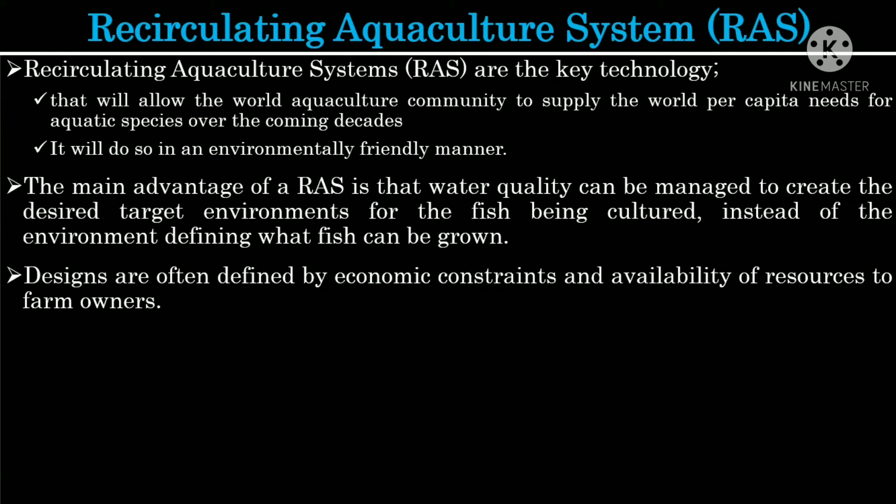There is no single system that will address all needs. Designs are often defined by economic constraints and the availability of resources to farm owners.

As a comparison, conventional aquaculture methods such as outdoor pond systems and net pen systems are not likely to be sustainable in the long term.

This is due to significant environmental issues and their inability to guarantee the safety of their products to consumers.

Conversely, indoor fish production employing RAS is sustainable, infinitely expandable, environmentally compatible, and has the ability to guarantee both the safety and quality of the fish produced throughout the year.

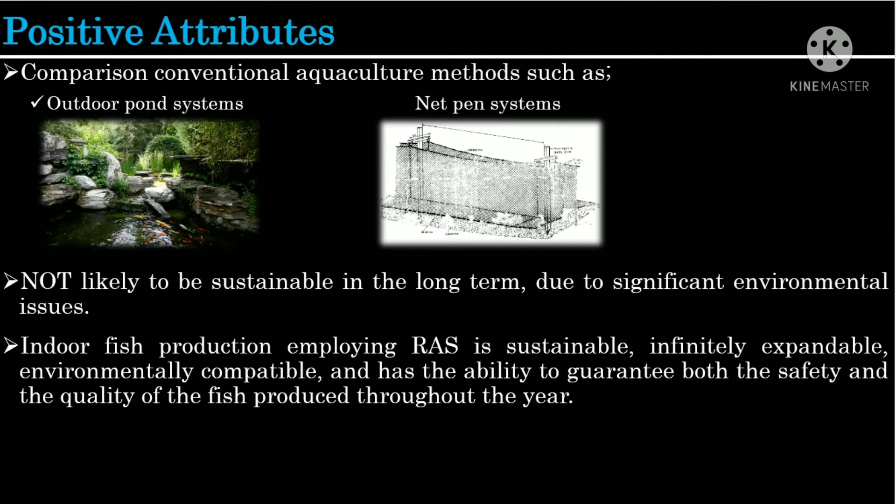Indoor RAS offer the advantage of raising fish in a controlled environment, permitting controlled product growth rates and predictable harvesting schedules.

RAS conserves heat and water through water reuse after reconditioning by biological filtration using biofilters.

It allows effective economies of scale, which result in the highest production per unit area and per unit worker of any aquaculture system. RAS are environmentally sustainable.

They use 90 to 99% less water than conventional aquaculture systems, or less than 1% of the land area, and they provide for environmentally safe waste management treatment.

RAS allows year-round production of consistent volumes of product and complete climate control of the rearing environment, because RAS can be set up to produce the same volume of fish week in and week out.

They have a competitive advantage over outdoor tanks, pond systems, or wild catch, which are seasonal and sporadic in harvest.

However, RAS are almost universally employed to produce salmon smolts, and designs continue to improve that are more cost competitive with conventional aquaculture systems. Recent economic studies on land-based salmon systems show that salmon can actually be produced more cheaply in RAS.

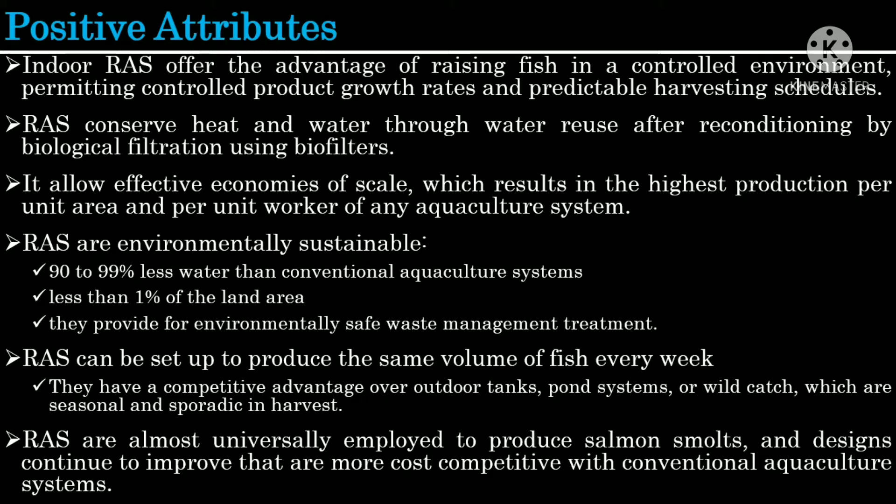But the capital costs are still too high to justify the major changes in the way salmon are currently grown in net pen systems.

Indoor aquaculture is probably the only potential method that could ensure a 100% safe source of seafood, free from all chemicals and heavy metals.

With increasing consumer concern about food safety, aquaculture producers using RAS have an unprecedented opportunity to meet the demand for safe seafood.

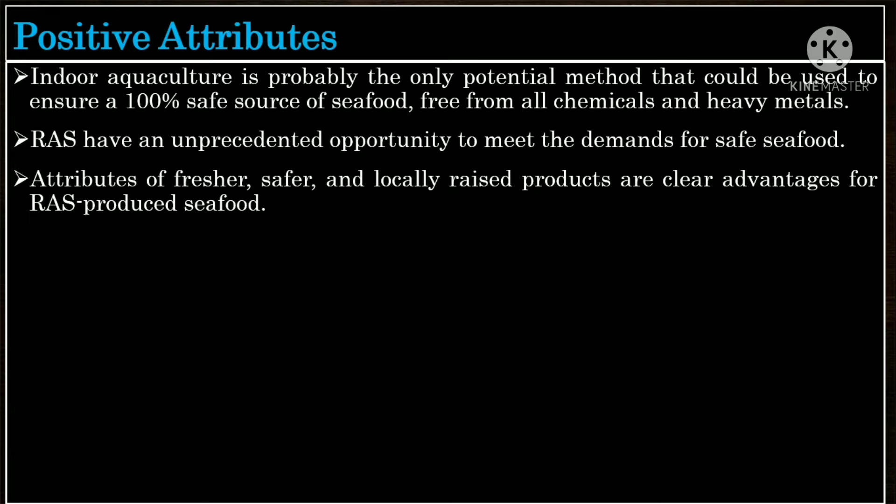The attributes of fresher, safer, and locally raised products are clear advantages for RAS produced seafood. So, next is the system engineering.

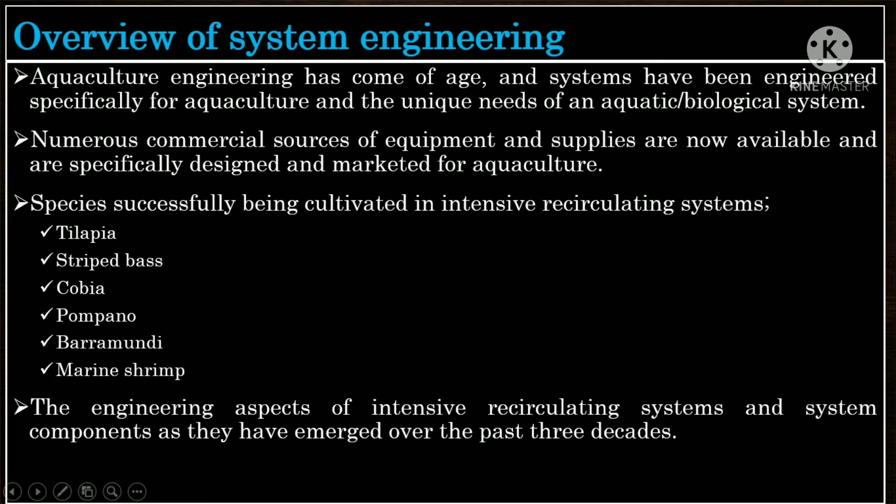Aquaculture engineering has come of age, and systems have been engineered specifically for aquaculture and the unique needs of an aquatic or biological system. In addition, numerous commercial sources of equipment and supplies are now available and specifically designed and marketed for aquaculture. Species successfully being cultivated in intensive recirculating systems include tilapia, striped bass, cobia, pompano, and barramundi, and marine shrimp. So here's an overview of the engineering aspects of intensive recirculating systems and the system components as they have emerged over the past three decades.

First, the concept of a unit process is introduced, where a specific treatment process is used to treat the water as it is recirculated through the system. For example, solids removal, ammonia converted into nitrate, oxygen added, carbon dioxide removed, and in some cases, if necessary, disinfection. Then, examples of treatment technologies currently used are described and linked together within a complete recirculating system design. And finally, a design example uses the engineering concept of mass balance to show how to estimate water flow requirements for oxygen, ammonia removal, solid waste removal, and carbon dioxide removal.

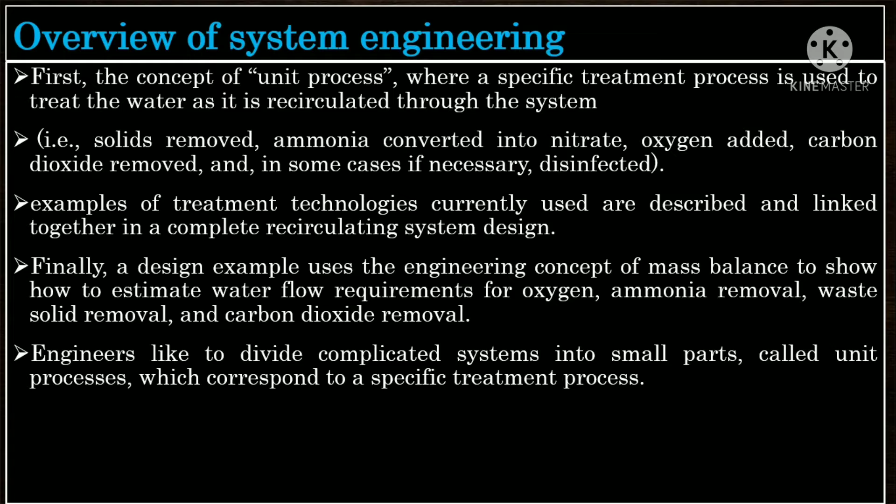The monitoring and control system oversees all of these processes and controls the set points of water quality, sounding an alarm if they move outside of acceptable ranges. A biosecurity program and process must be absolutely superimposed on the whole process and farm to prevent losses due to disease introduction from the outside.

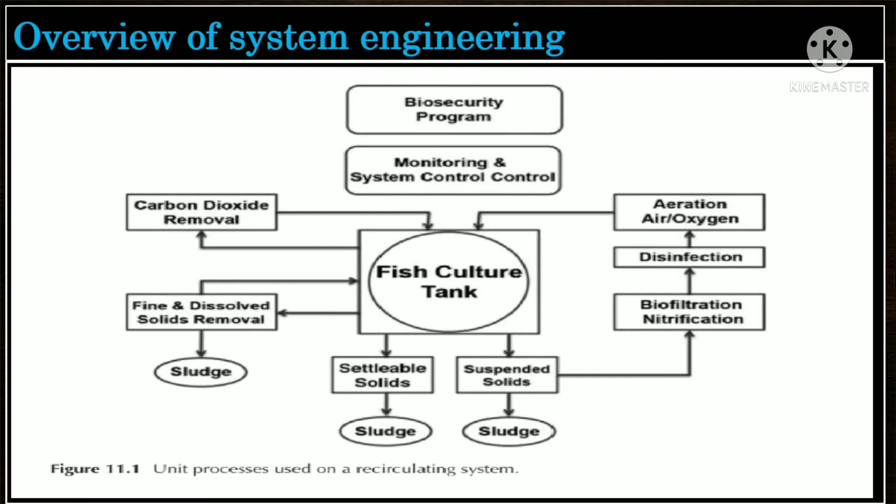In a real-world system, the individual unit processes are usually linked together as the water flows through each process of the recirculation. Usually, 10 to 20% of the discharge flow from a culture tank is removed from the center drain to take advantage of the teacup effect, which concentrates the solids to the central drain flow. Some form of suitable solids removal device, like a swirl separator, radial flow clarifier, or settling basin, pretreats this flow stream, which is then combined with the remaining 80 to 90% of the discharge from the side outlet.

This combination of center drain and sidewall drain is usually referred to as a Cornell dual drain system. The remaining suspended solids are then removed, usually by either a rotating microscreen filter or floating bead filter.

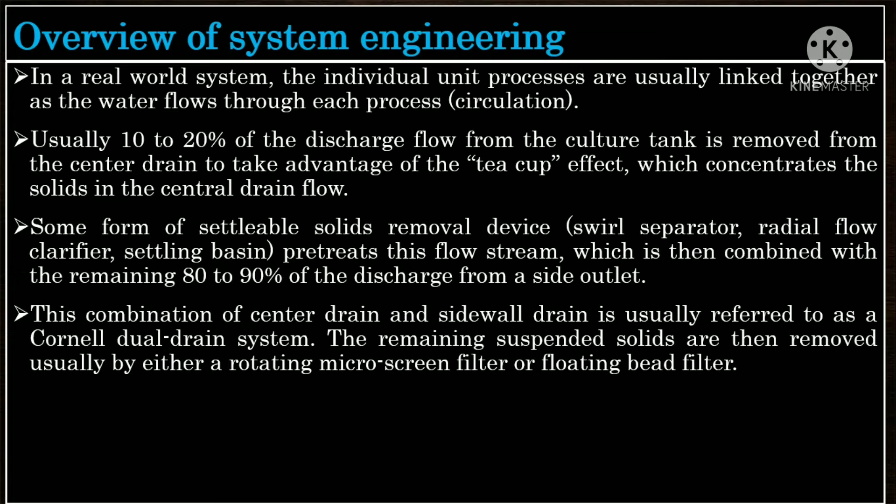Next is the culture tanks. People have used a wide variety of materials to construct tanks, including just about anything that holds water. Simple molded polyethylene tanks are often used due to their low cost, smooth surface that makes for easy cleaning, and their low weight, which allows for quick setup and relocation. They work well for the most part, but because they are very soft and malleable, they need to be well supported on the bottom.

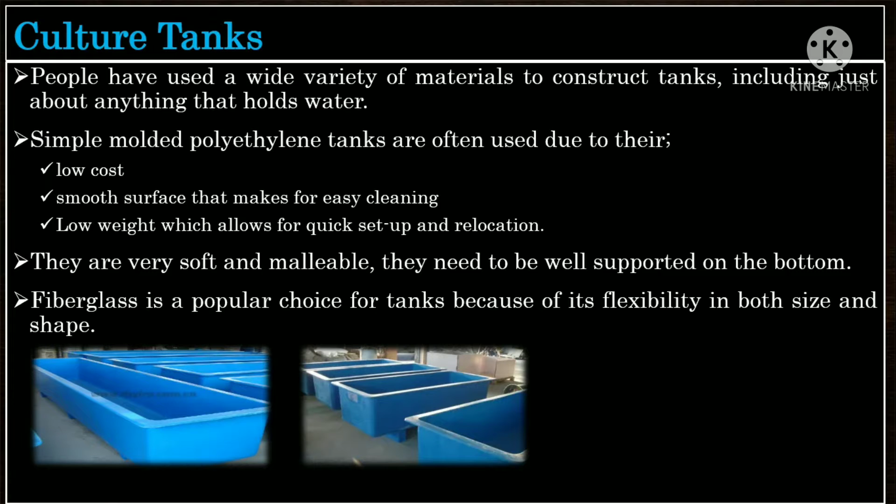Fiberglass is the most popular choice for tanks because of its flexibility in both size and shapes. The fiberglass tank panels are easy to cut, drill, and modify, and repairs are relatively easy. Large fiberglass tanks come in easily transported components that are field assembled in almost any diameter. The bottoms are usually poured concrete where the drains and heating coils are embedded, along with the tank sidewall.

Tanks can be partially buried to conserve heat and make fish observation easier. Concrete is always an option in making tanks. It is extremely strong but very permanent. Mixed cell raceway designs are another option for tank design, combining the advantages of a raceway for grading and sorting and a round tank for solids removal.

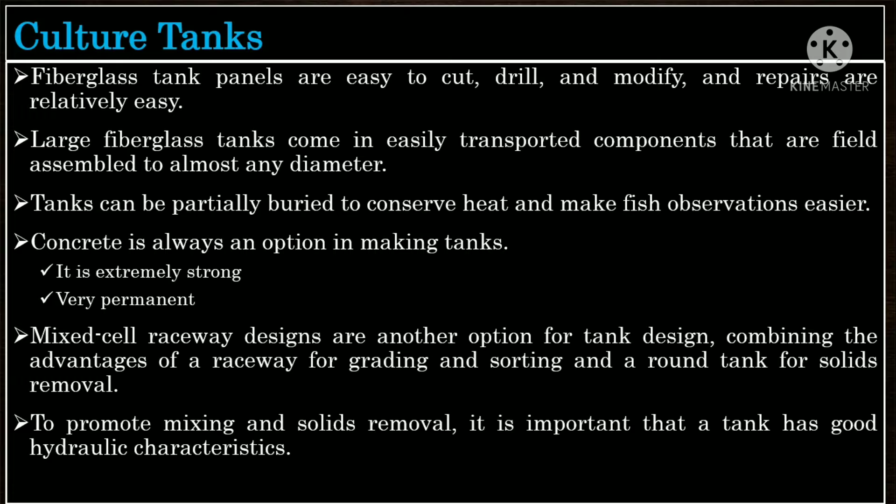To promote mixing and solids removal, it is important that a tank has good hydraulic characteristics. One of the most important rules for RAS is that solids need to be removed from the tank as quickly and efficiently as possible to reduce the solids' impact on water quality. Tanks can be characterized by diameter, capital D, to depth, small d, ratio, which is the diameter-to-depth ratio.

This ratio should be maintained greater than 3 and less than 10, and preferably less than 5, as in the deeper tank given the same diameter.

Using this range of D/d ratio will minimize the problems of solids settling before reaching a center drain, indicating that a tank is too shallow, that is an excessive D/d ratio.

Or not settling fast enough to reach the drain by being continually resuspended, indicating a silo type tank that is too deep, and that is too small of a D/d ratio.

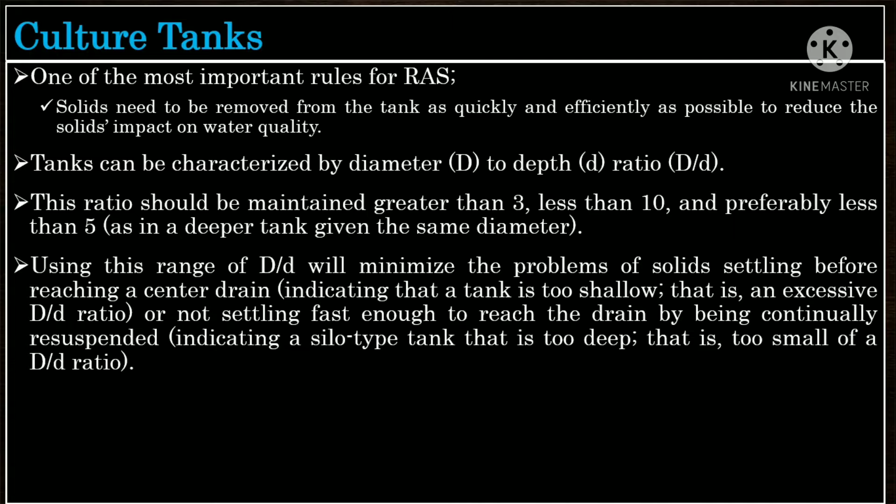Next is waste solids removal. Waste solids are produced in an aquaculture system as uneaten feed, feed fines, fish fecal matter, algae, and sloughed biofilm cell mass from biological filters.

The waste solids influence the efficiency of all other unit processes in the recirculating system, and they are a major source of carbonaceous oxygen demand and nutrient input into the water, and can directly affect fish health within the recirculating system.

Therefore, solids removal is considered one of the most critical processes in an aquaculture system.

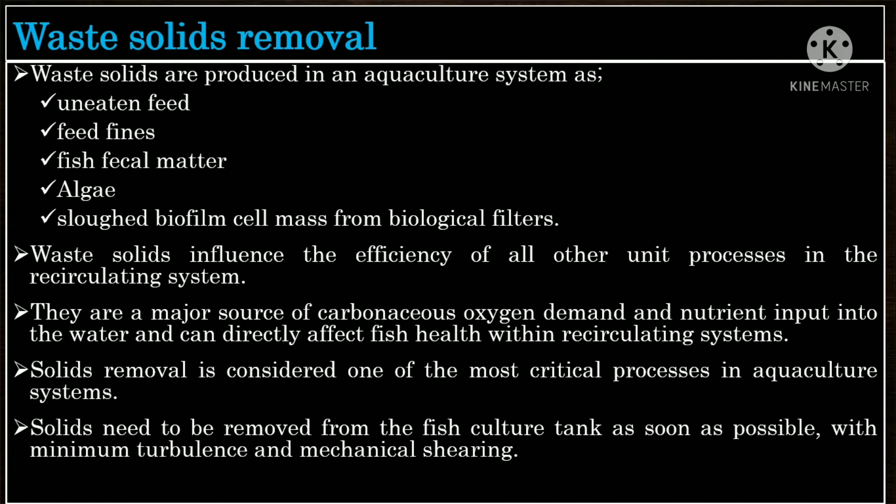Optimally, solids need to be removed from the fish culture tank as soon as possible, with minimum turbulence or mechanical shearing. Solids are generally classified into three categories: settleable, suspended, and fine or dissolved solids.

In a recirculation system, two of these are the primary concern. The waste solids can be removed either through settling within the culture unit or through the use of a solids removal unit.

Following the rearing tank, several unit process options are currently being used in aquaculture: settling basins and radial flow clarifiers, mechanical filters, granular media filters, and flotation or foam fractionation.

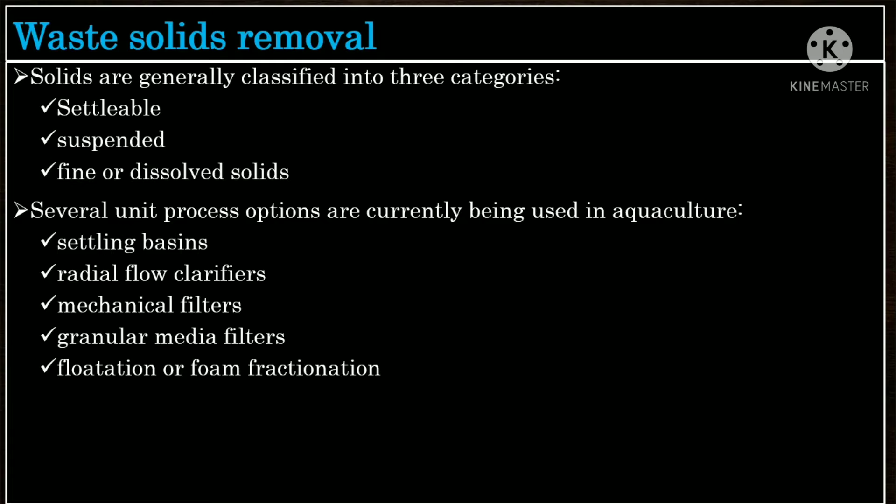Next is the Cornell dual drain system. It uses the culture tank itself as a swirl separator, the teacup effect, and removes most of the settleable solids from a small percentage of the discharge from the center drain.

The design is applicable to round tanks, and it is very effective in removing the majority of large, quickly settleable solids such as uneaten feed and fecal matter.

This is achieved using only a small portion of the total water flow, 10 to 25%. This waste stream can then be further concentrated using either settling basins or additional swirl separators.

Remember, the objective is to create a small, concentrated flow that is easily treated, rather than a large, diluted flow of waste.

Solids concentrated at the bottom center can be removed in a small flow stream by using the bottom drawing center drain, while the majority of the flow is withdrawn at an elevated drain. The dual drain system uses a center drain that removes 10 to 25% of the flow and a higher sidewall drain for the majority of the flow.

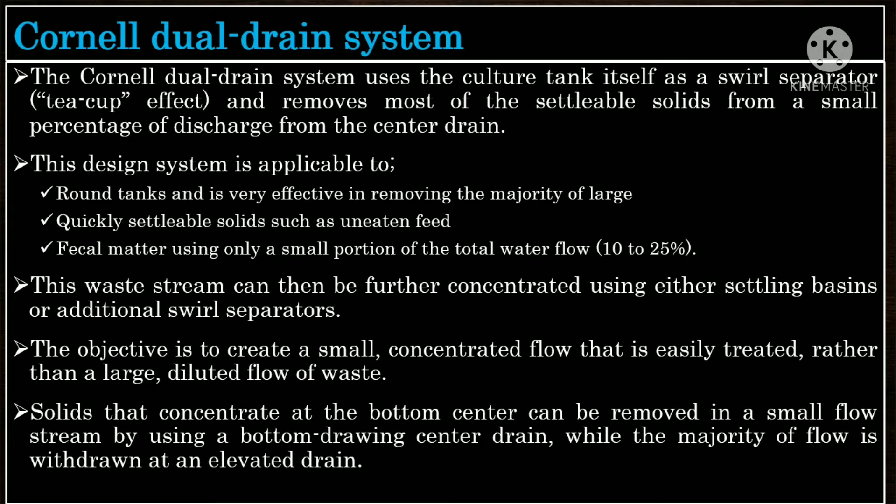These are 6 liters per minute per meter squared, or 0.15 GPM per foot squared of the tank floor area.

The hydraulic retention time, or HRT, for the center drain should be less than 200 minutes, and 15 to 25% of the total tank flow rate.

After calculating these three values, the largest of the three should be used. A final criterion that should be applied to the drain design outlet is that the tank outlet should be approximately 10% of the tank diameter.

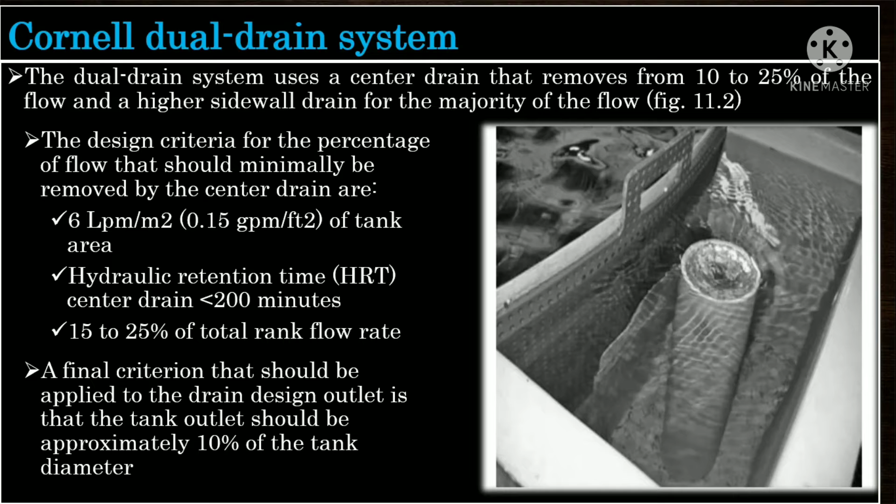This is because of the D to D ratio. The recommendation is as follows: solids should settle on the floor within 5% of the tank diameter of the center drain and be removed there.

For example, if a tank were 10 meters in diameter, the center drain should have an effective diameter of 1 meter, using a flat plate slightly elevated above the tank floor.

And the solids will settle within 0.5 meter of the center point of the tank floor. This solid would then be drawn into the center drain by the high velocity created by the flow out of the center drain. By concentrating the majority of the solid waste in only 10 to 25% of the flow leaving a tank via the center low flow drain.

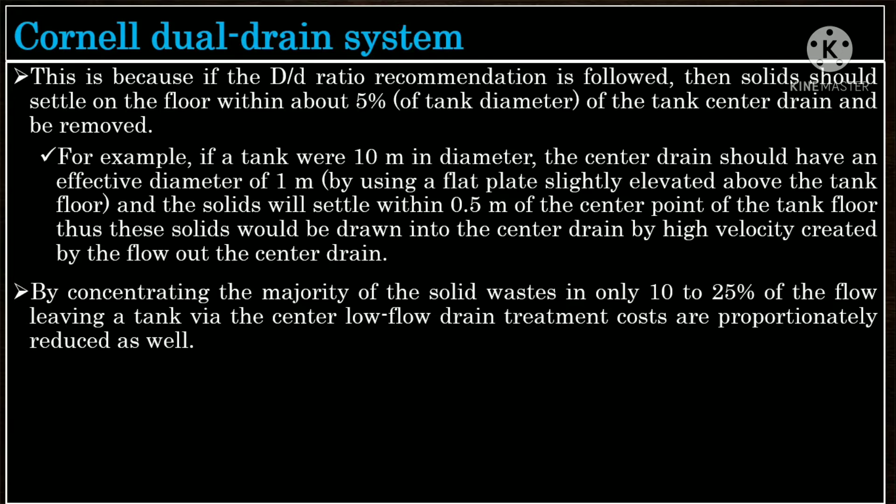Treatment costs are proportionately reduced as well. Next is settling basins and tanks.

A settling basin is simply a tank that provides a quiet, non-turbulent area where the flow rate is low and the solids are allowed to settle out of suspension by gravity.

The advantages of settling basins are simplicity of operation, low energy requirements, and low construction costs.

The disadvantages include the large size of settling basins, their low removal efficiency of small or low density particles, and leaching of nutrients from the settled solids back into the system while the solids are stored in the settling basin.

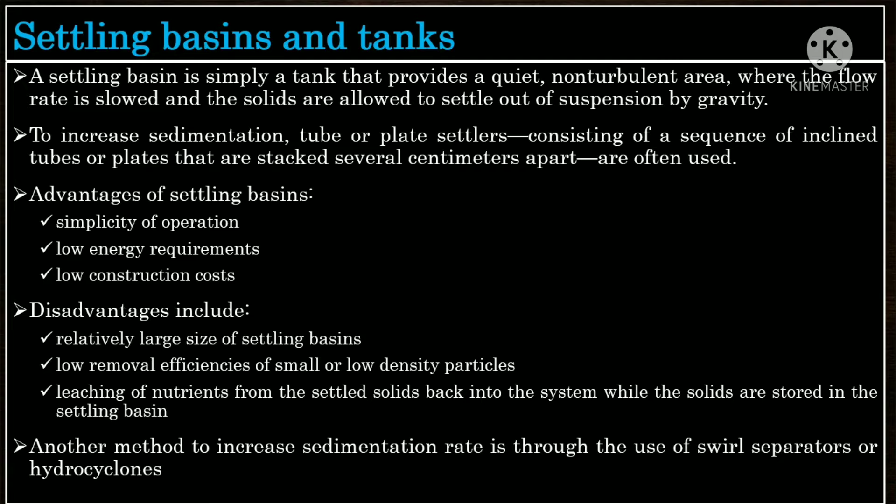Another method to increase the sedimentation rate is through the use of swirl separators, or hydrocyclones, and these have most often been used in aquaculture circulating systems to concentrate the solids from the dual drain culture tank system.

Next are the mechanical filters. There are two types of mechanical filters commonly used in aquaculture to remove the suspended solids: the screen filters and the expandable granular media filters.

The suspended solids from an aquaculture viewpoint are within the fraction of total solids that will not settle out of the water column in a reasonable amount of time, within 30 to 60 minutes. This fraction of solid waste needs to be removed from the culture tank water because of its potentially high oxygen demand and mineralization, with an increased rate of ammonia nitrogen being added to the water column as the protein and urea in the feces is broken down by bacteria into ammonia.

Microscreens are used to remove suspended solids in both research and commercial recirculating systems, and they act as a form of sieve that retains suspended particles larger than the fine mesh filter screen openings.

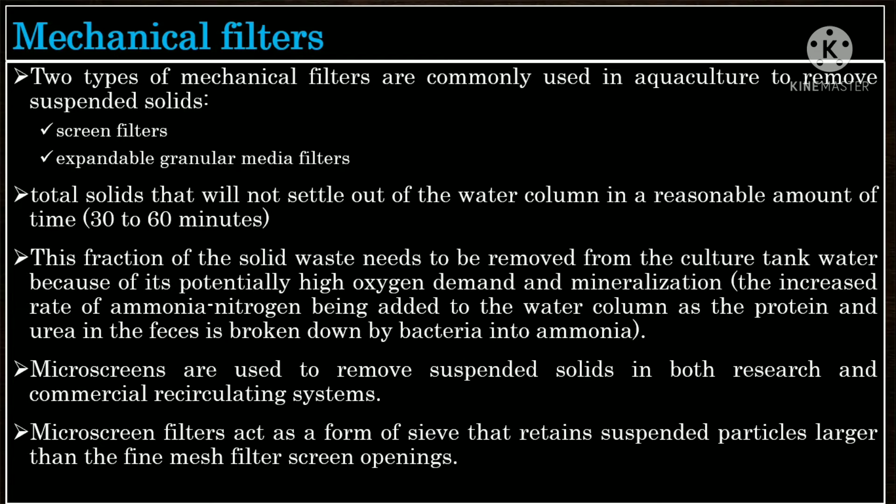The rotating microscreen filters, in a variety of sizes and flow rate capacities, have numerous advantages. The primary one is that they are easy to install and operate. Almost all microscreen filters work on the principle of physical interception of particles on screen and their removal by means of a water spray.

Microscreens are especially attractive when used to remove solids from large flow streams, and they are compact in size and cause minimal head loss. The disadvantages of these systems are high maintenance requirements and relatively high capital and operating costs.

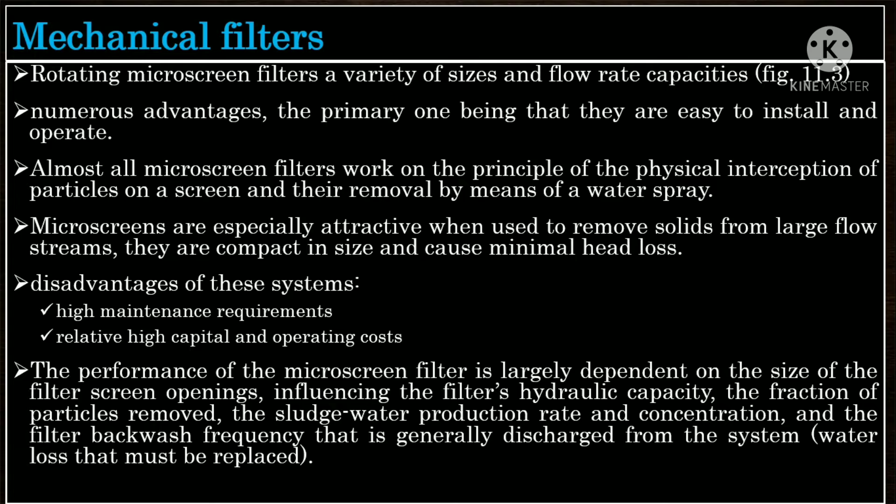The performance of the microscreen filter is largely dependent on the size of the filter screen openings, influencing the filter's hydraulic capacity, the fraction of particles removed, the sludge water production rate and concentration, and also the filter backwash frequency that is generally discharged from the system, with the water loss that must be replaced.

Next are the granular media filters. The granular media filters operate by passing the water laden with suspended solids through a bed of granular material, which traps the solids through sedimentation, straining, and interception.

The bead filters are the most popular form due to their low head loss and low water requirements for backflushing. The bead filters have replaced the use of sand filters for all practical purposes.

While the sand filters can do a superb job at removing the solids, typically a sand bed is flooded from the top and water is allowed to percolate through the sand. Sand filters, such as those used in swimming pools, operate under the same principle but use water pressure to force the solids-laden water through the sand.

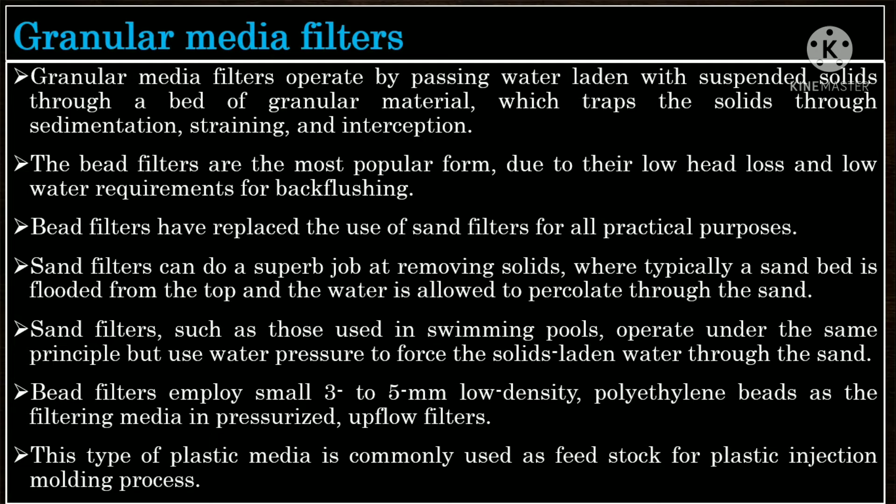The bead filters employ small 3 to 5 millimeter low density plastic media, commonly used as feedstock for the plastic injection molding process. These filters have been successfully used for both solids capture and biofiltration.

Traditionally, the disadvantage of this type of filter has been a large volume of water required for backflushing, although much less is required than the sand filter design. The PolyGeyser class of bead filters has successfully addressed this problem.

The suspended solids and dissolved organic compounds that build up over time in intensive recirculating systems are not removed by mechanical filtration or granular media filters.

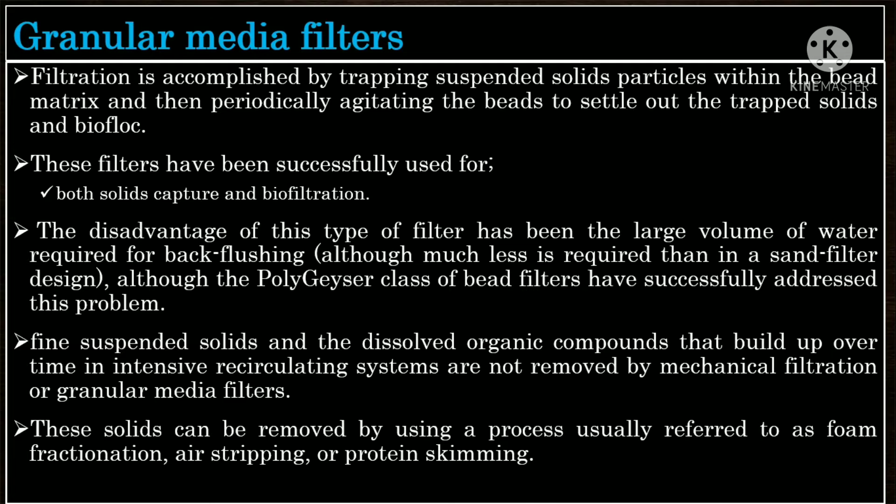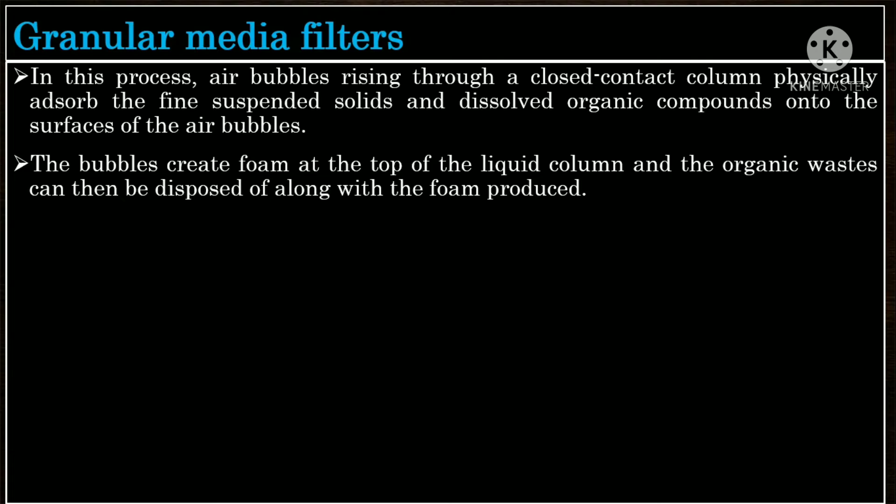These solids can also be removed using a process usually referred to as foam fractionation, air stripping, or protein skimming. In this process, air bubbles rising through a close contact column physically adsorb the fine suspended solids and dissolved organic compounds onto the surfaces of the air bubbles. The bubbles create foam at the top of the liquid column, and the organic wastes can be disposed of along with the foam produced.

Next is the disposal of the solids. In general, aquaculture solid wastes are treated as an agricultural waste and considered a non-toxic nutrient source. Land application of the waste solids on-site at agricultural fields is usually the cheapest method of solids disposal.

Land application is governed by regulations that limit the amount of pathogens, heavy metals, and other contaminants such as nutrient content, soil type, and plant nutrient uptake. These characteristics are meant to prevent runoff or groundwater contamination.

One of the newest techniques for containing sludge is to use geotextile bags. These are porous textile bags that receive the waste stream and capture solids while allowing the water to drain off for recapture. In many cases, a polymer or flocculation agent is added to the influent to improve solids-liquid separation. Alum or ferric chloride can also be added as a coagulation aid, which also helps sequester dissolved phosphorus. Composting of waste solids using thermophilic bacteria creates a valuable soil amendment and can also be used to dispose of fish mortalities in a safe manner. The anaerobic and aerobic waste will require careful engineering design to be properly sized and managed.

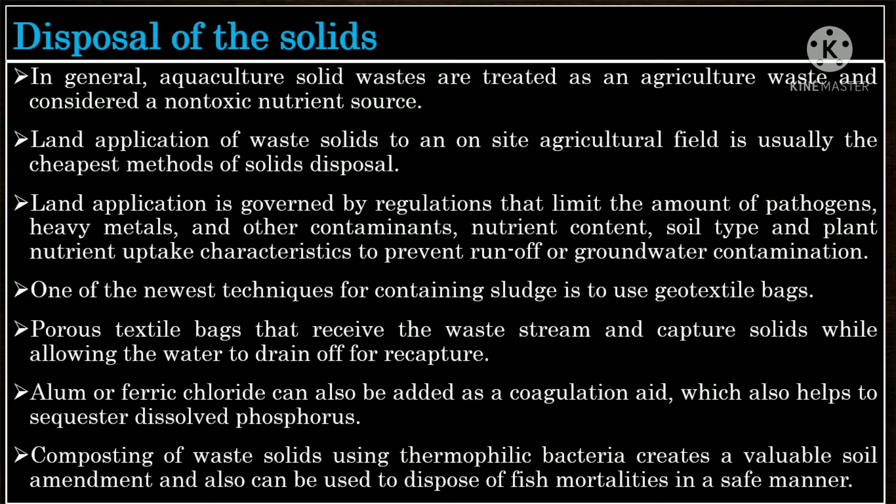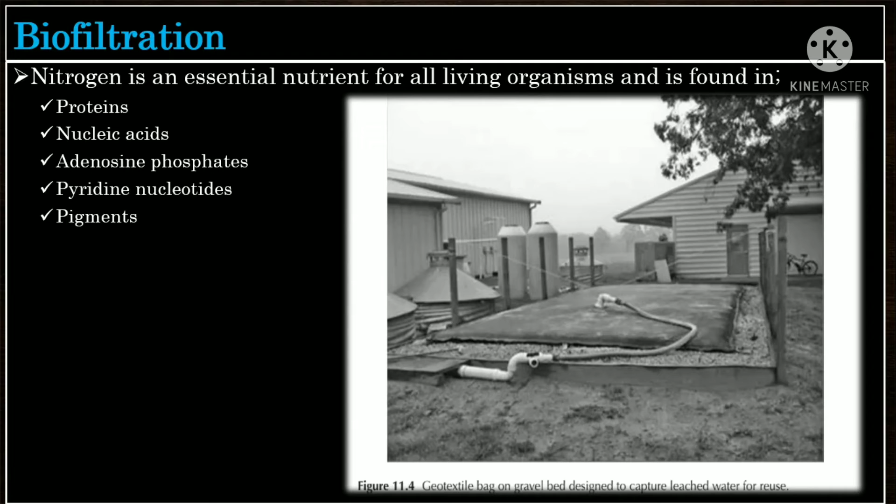Next is biofiltration. Nitrogen is an essential nutrient for all living organisms and is found in proteins, nucleic acids, adenosine phosphates, pyridine nucleotides, and pigments.

There are four primary sources of nitrogenous waste. The first is urea, uric acid, and amino acids excreted by the fish. The second is organic debris from dead and dying organisms. The third is uneaten feed and feces. And the last is nitrogen gas from the atmosphere.

Various nitrogenous waste products are expelled by the fish through gill diffusion and gill cation exchange, along with urine and feces. The decomposition of these nitrogenous compounds is particularly important in intensive recirculating aquaculture systems because of the toxicity of ammonia, nitrite, and to some limited extent nitrate.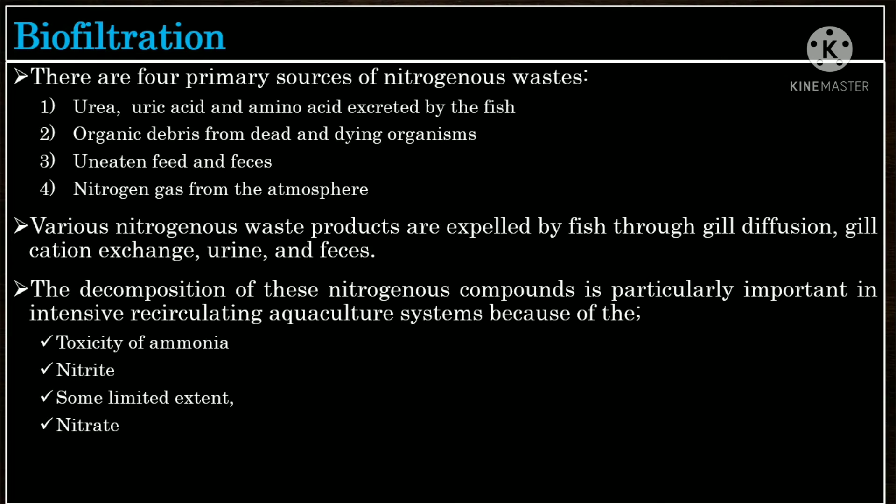The reverse process is called denitrification, an anaerobic process where nitrate is converted into nitrogen gas. Denitrification is becoming increasingly important, especially in marine systems, as stocking densities increase and water exchange rates are reduced, resulting in excessive levels of nitrate in the culture system.

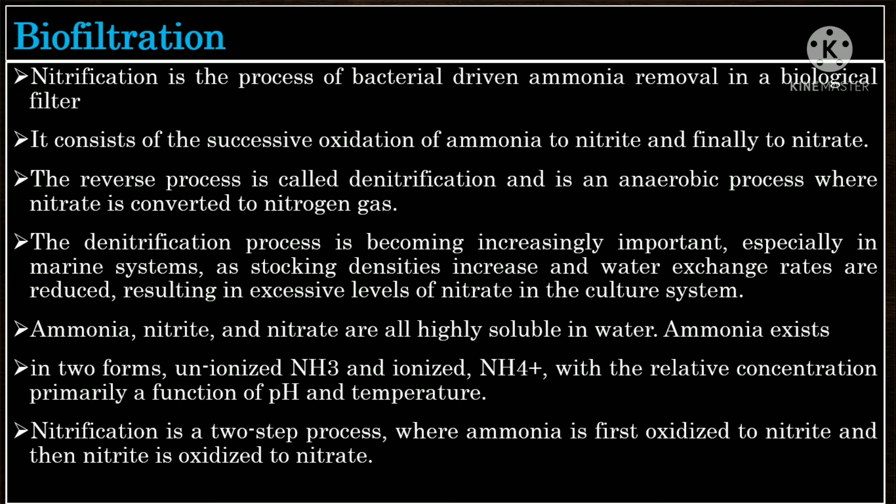Ammonia, nitrite, and nitrate are all highly soluble in water. Ammonia exists in two forms, unionized and ionized, with the relative concentration primarily a function of pH and temperature. Nitrification is a two-step process where ammonia is first oxidized to nitrite, and then nitrite is oxidized to nitrate. These two steps are normally carried out sequentially.

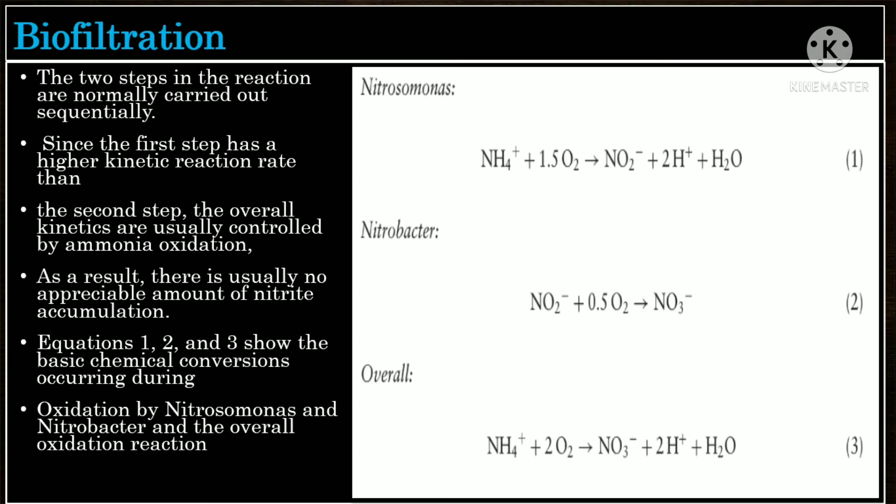Since the first step has a higher kinetic reaction rate than the second step, the overall kinetics are usually controlled by ammonia oxidation, and as a result there is usually no appreciable nitrite accumulation. As shown in equations 1, 2, and 3, these show the basic chemical conversions occurring during oxidation by Nitrosomonas and Nitrobacter, and the overall oxidation reaction.

Alkalinity, measured or defined in terms of calcium carbonate, is generally added using sodium bicarbonate or baking soda, or calcium carbonate, and slaked lime or hydrated lime. Sodium bicarbonate has the advantage of being rapidly dissolved and very safe to handle — you can even eat it if your stomach is upset.

The ammonia removal capacity of the biological filter is largely dependent upon the total surface area available for biological growth of nitrifying bacteria. The media used in biofilters must be inert, non-compressible, and not biologically degradable. Typical media used in aquaculture biofilters are sand, or some form of plastic or ceramic material shaped as small beads, large spheres, rings, or saddles.

Biofilters must be carefully designed to avoid oxygen limitation or excessive loading of solids, biochemical oxygen demand, or ammonia. There are several types of biofilters commonly used in commercial intensive recirculating aquaculture systems: trickling biofilters, floating bead filters, fluidized bed biofilters, downflow microbead filters, and moving bed bioreactors, or MBBR.

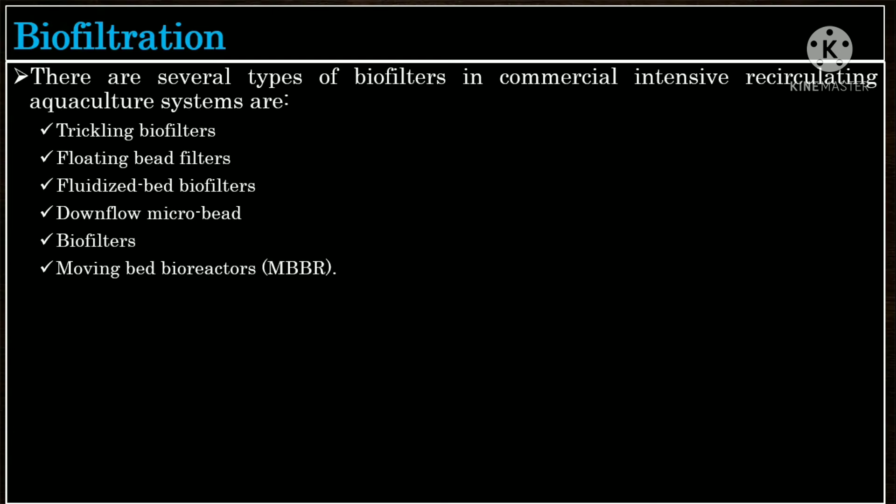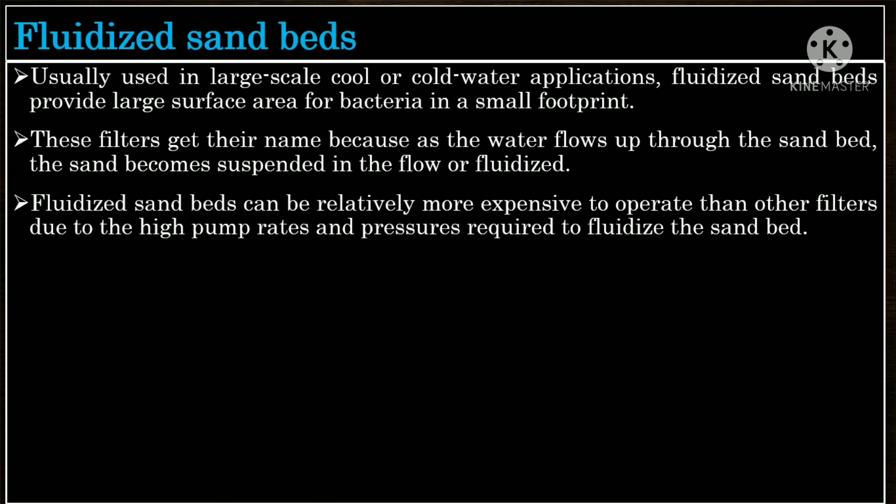Next are fluidized sand beds, usually used in large-scale cool or cold water applications. Fluidized sand beds provide a large surface area for bacteria in a small footprint. This filter gets its name because as water flows up through the sand bed, the sand becomes suspended in the flow, or fluidized. Fluidized sand beds can be relatively more expensive to operate than other filters due to the high pump rates and pressure required to fluidize the sand bed.

The trickling towers are the classical biofilter, combining biofiltration, aeration, and degassing into one unit process, and they can be constructed to any diameter required. Effective distribution of the influent water over all the media, both horizontally and vertically, is a continual challenge.

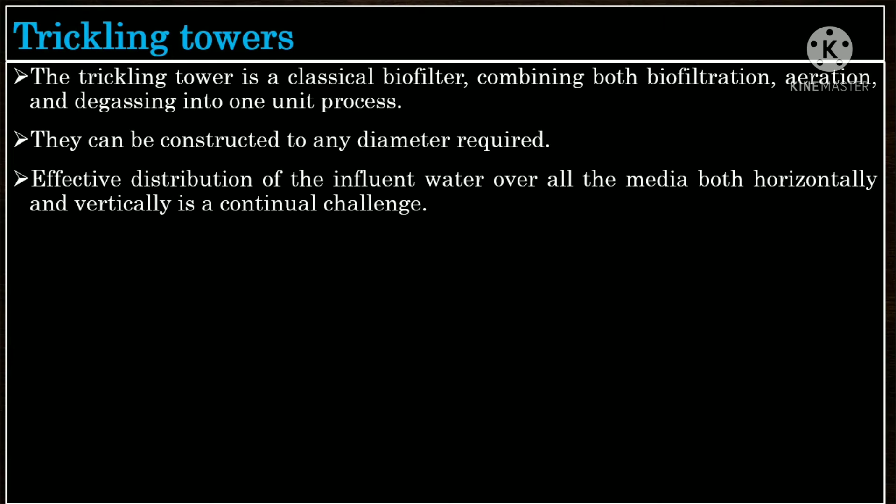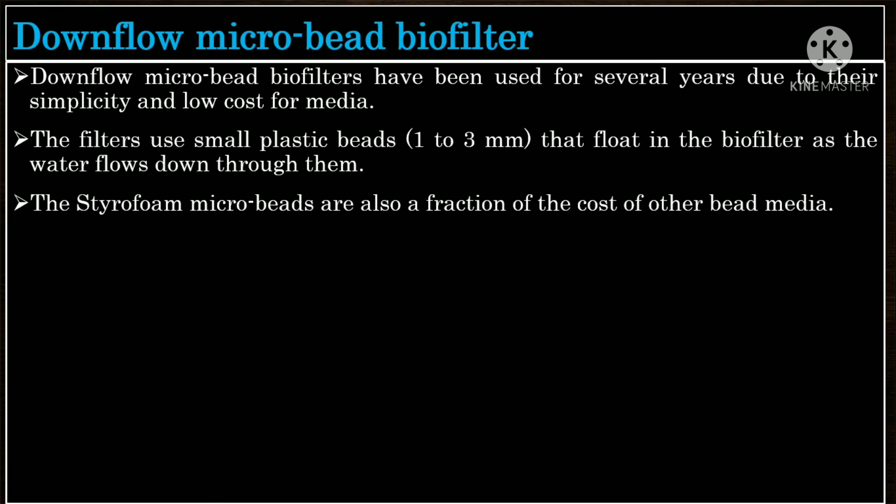The downflow microbead filters have been used for several years due to their simplicity and low cost for media. The filter uses small plastic beads, 1 to 3 millimeters, that float in the biofilter as the water flows down through them. The styrofoam microbeads are also a fraction of the cost of other bead media.

Floating bead filters use beads that are slightly buoyant. The beads provide surface area for the bacteria and also trap solids. The backwashing of the filter is accomplished either mechanically with a motor or propeller, or with air bubbles.

In a desired backwash or mixing cycle, after mixing and breaking up the floating bed, the bed is allowed to settle for a minute, and then the settled sludge is discharged by opening a valve at the bottom of the filter, which cleans the beds and removes the resulting sludge.

Newer designs for bead filters have a capacity to minimize water loss during the cleaning cycle, which is advantageous in marine systems where the loss of salt water is minimized, thus decreasing operating costs.

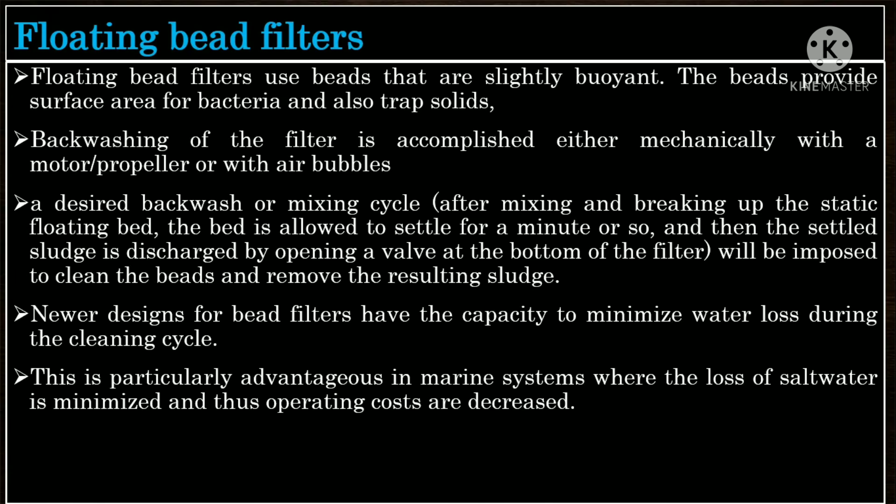The moving bed bioreactors, or MBBR, have been introduced over the last several years and appear to be one of the most competitive of all biofilter types. The media remain in suspension as the water flows through the biofilter, which is actively aerated. The high turbulence and aeration provide good mixing and contact with the media.

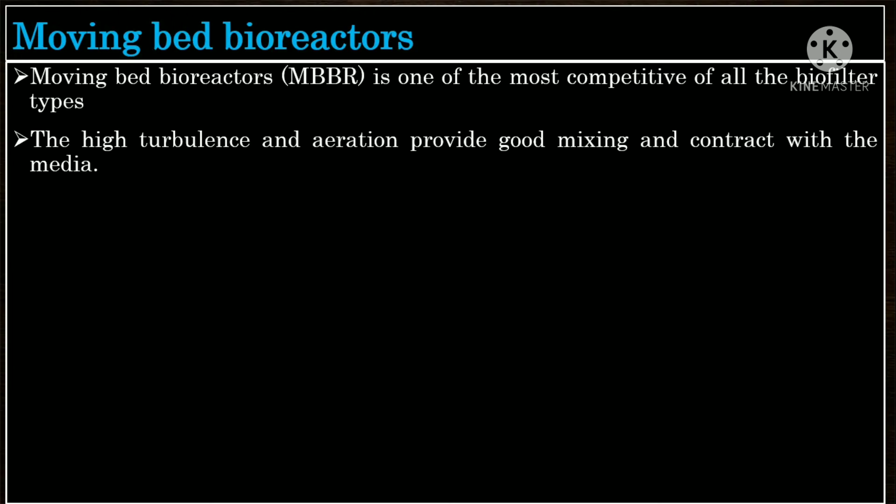The choice of biofilter: each biofilter described has advantages and disadvantages. One chief advantage of both the trickling biofilter and the MBBR is that they both add oxygen to the water flow during normal operation, and they can provide some carbon dioxide stripping.

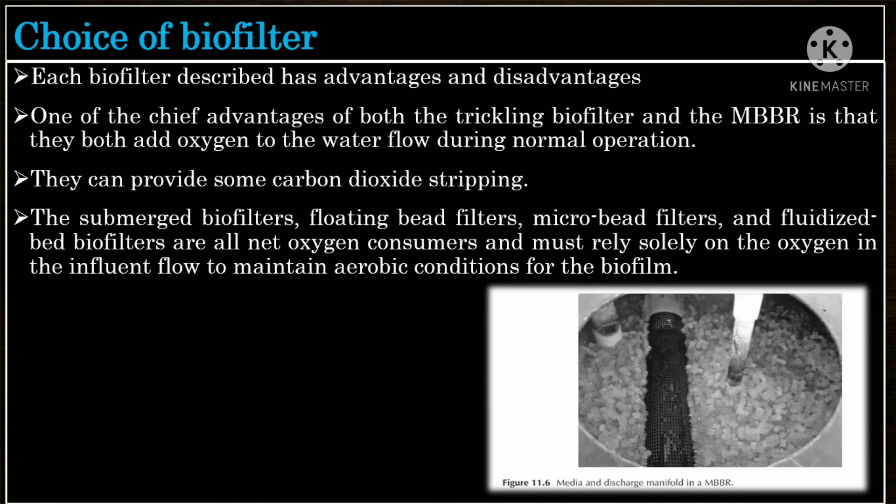In contrast, the submerged biofilters, the floating bead filters, microbead filters, and fluidized bed biofilters are all net oxygen consumers and must rely solely on the oxygen in the influent flow to maintain aerobic conditions for the biofilm.

The application of low-specific-surface-area media is a distinct disadvantage for both the trickling biofilters and the MBBR. Since capital cost is proportional to the total surface area of the filters, the result is physically large and requires more costly filters. In contrast, floating bead filters, and especially fluidized bed filters and downflow microbead filters, use media with high specific surface area, reducing the cost and space requirements for the equivalent surface area.

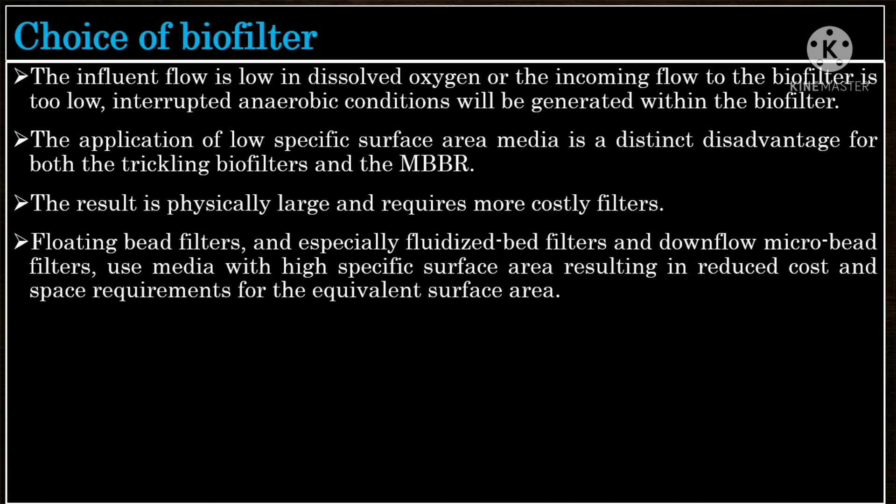Aeration and oxygenation: dissolved oxygen is the first limiting factor in intensive aquaculture systems. The minimum dissolved oxygen required for optimal growth and survival of most aquaculture species must be maintained. Aeration with atmospheric oxygen is adequate to maintain this level and is commonly referred to as aeration.

At higher stocking densities, pure oxygen is required and is usually referred to as oxygenation. In the oxygenation process, pure oxygen is used to increase the transfer rate and yield supersaturated oxygen concentration, theoretically 5 times that of aeration with atmospheric oxygen.

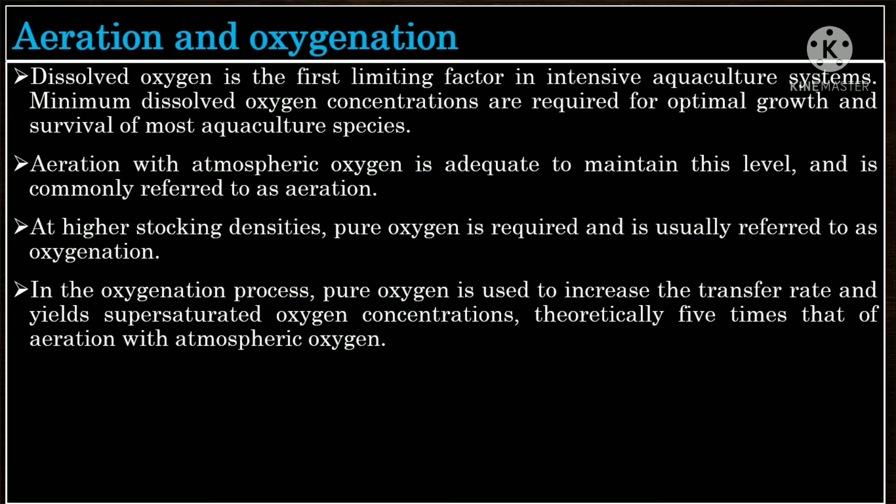Oxygen can be produced on site using pressure swing adsorption, or PSA, equipment, or purchased in bulk liquid or gas form from commercial sources. Numerous types of oxygen transfer equipment are now available commercially, including U-tubes and multi-stage low-head oxygenation units, packed columns, pressurized columns, oxygenation cones, oxygen aspirators, bubble diffusers, and enclosed mechanical surface mixers.

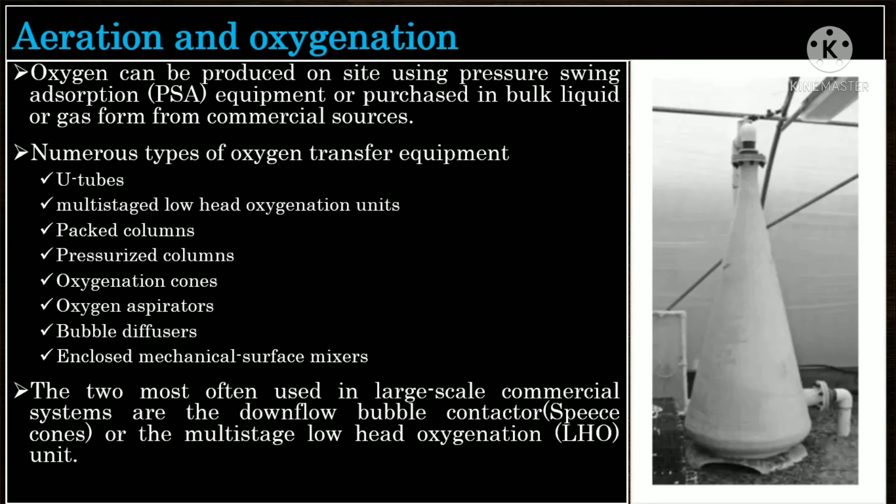The two most often used in large-scale commercial systems are the downflow bubble contactor, also called the Speece cone, as shown in the figure, and the multi-stage low-head oxygenation or LHO unit. The downflow bubble contactor, or Speece cone, consists of a cone-shaped column with water and oxygen injected at the top and removed at the bottom.

The multi-stage low-head oxygenation unit, or LHO, increases oxygen transfer efficiency by reusing the oxygen feed gas through a series of contact chambers. The water flow is distributed equally through a series of chambers via a perforated plate. Flow passes through the chamber and into a pool of water, which seals the lower outlets.

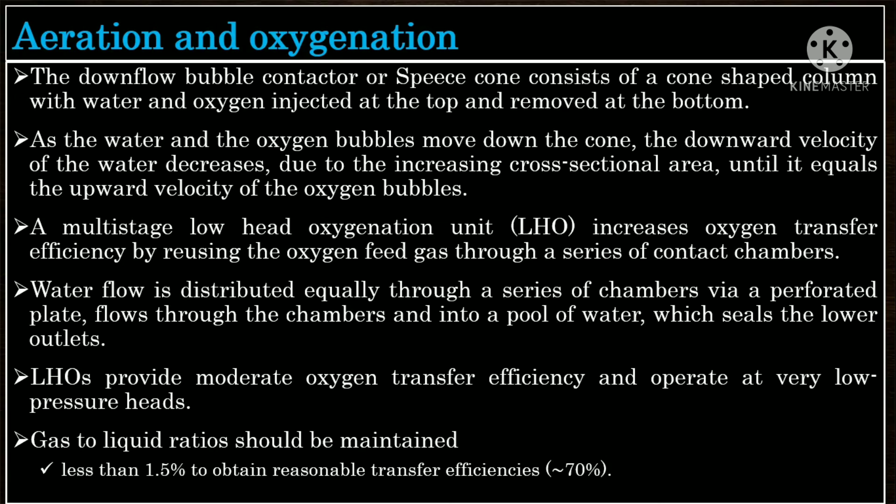The LHO provides moderate oxygen transfer efficiency and operates at very low pressure heads. The gas-to-liquid ratio should be maintained at less than 1.5% to obtain a reasonable transfer efficiency of 70%.